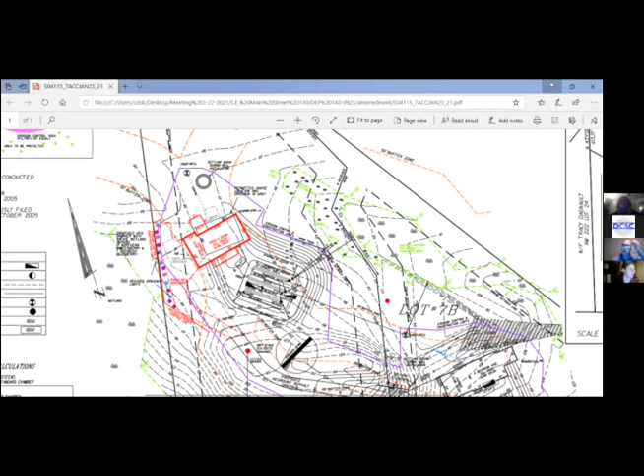I'm opening the Google Drive. I also don't remember which one this is. Excuse me, but I don't think there is a 170 Southeast Main. I live at 172, it's 130. Oh, it says 170 — where does it say that? In today's agenda. The draft number 1 said 170 and I was corrected, so I changed it to 130. So what's posted is 130. I have it 130 everywhere that I'm looking. So I'm looking at what was in my email, but maybe that's old, maybe there's — it was the first email that was updated.

I think this is the one where the gentleman has some physical problems and is looking to modify his plan. So it was going to be a 2-story and it went to a ranch, and we were having issues with the perimeter there. Correct. Did you want to give a brief rundown or recap? Yeah.

For the record, Margaret Bacon, engineer with Civil Site Engineering. I'm here representing David LaRue, requesting a modification to an existing order of conditions for 130 Southeast Main Street.

As discussed at the last meeting, we're revising the house plan from a 2-story colonial to a 1-story ranch, which has a slightly larger footprint, shown in red. The originally permitted driveway had a garage coming in on the side, which is causing us to move back the erosion control and ask for this modification, since it's a slightly bigger footprint than what was previously permitted. The reason for the house change is medical reasons for the property owner, who would like a 1-story ranch instead of a 2-story colonial.

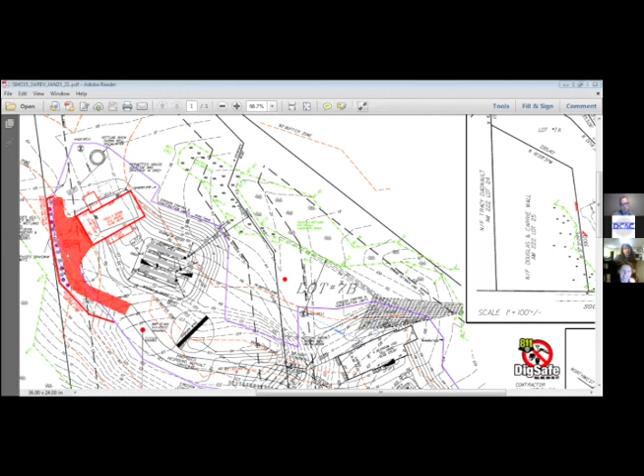So, there it is. I kind of hatched the relocated driveway in red, and if you look a little closer you can see the grading changes I made.

I've changed the grading so the water will flow down the driveway - here's the grade line, spot elevations, and then it flows that way, so I'm not flowing directly into that wetland there. I've also created a little berm here where these plantings are going to be, to keep stormwater on this property.

The impacts to the buffer zone are slightly larger - total buffer zone impact change is 1,200 square feet. Initially, total impacts before were 21,655 square feet, and now it's 22,915.

But I think we've addressed all the comments that the commission had at the last meeting. Okay.

Thank you, Margaret. Alright, so looking at this in the files in the Google Drive, board, did we have any updated comments or questions?

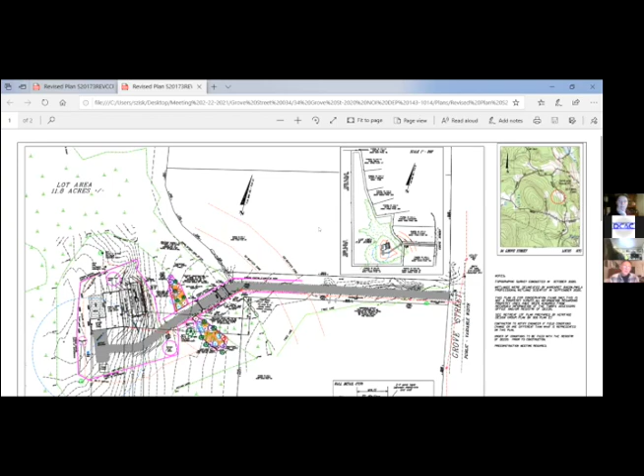I would want the driveway, because that contributes probably the most runoff, to run through the replication area before it gets to the wetland. Actually, I've got a lot of the lawn area and the house area all grading down towards those replication areas. So actually, the replication areas are going to act like little stormwater attenuation basins, which has benefits in itself.

Right, I agree. But the driveway itself - sometimes driveways get two wheel rut marks that carry the water. So I would want to make sure the driveway is crowned or slanted so the water runs off it before it gets to the wetland, and runs into those replication areas.

And I guess there is grading under - I can see it now, it's just that it's shaded. Correct, well I hatched the driveway so it sticks out.

And I do have high points on that crossing, but I can get most of the water to go towards those replication areas. This was a paved driveway, right, Mark? Yes. Yeah.

Yes, it says asphalt driveway. So if you could, I would like to see it go to the one below the septic system, because from there it then has to go through the pipes.

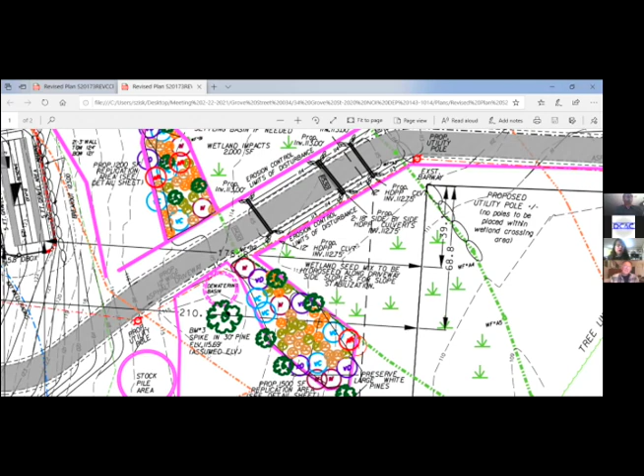That's further attenuation of any stormwater. I'm really thinking of the neighbor, because they already have some issues with water in their backyard. Yeah, what I can do is put a little swale along that driveway to funnel the water right over to that upper replication area. That's what you're looking for, correct? And I'm looking for the grades on those lower grades, instead of having them move water to the right, have them move water to the left.

As you're leaving the house and going towards the road, that lower grade, that 116, it's coming across on a diagonal. It should be a diagonal the other way, so that the water comes off that driveway and goes towards the detention area on the left side of the driveway as you go out to the road.

So looking at this plan right now, you want mostly everything to go to that upper replication area? I think that would be best, in my opinion, yes. And I can easily do that. All I have to do is put in a swale along the edge, on the high side of that driveway, to funnel all that water over there.

Right, but the driveway water too, not just the water before it hits the driveway, but the water on the driveway itself. Correct, yeah, no, I know what you mean. Okay, thank you.

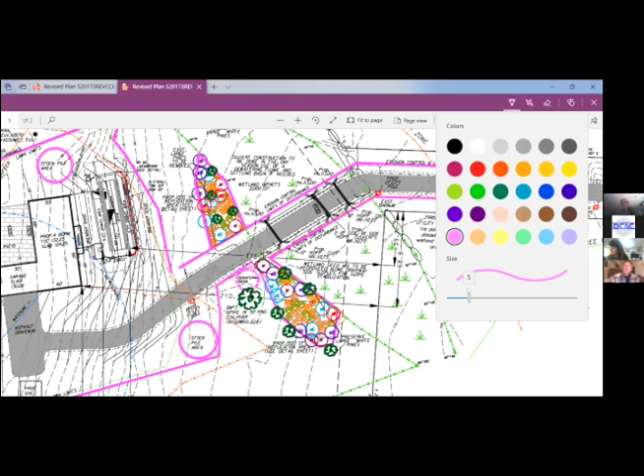Anything else, Mark? No, that's my only concern. And Eric? What was the size of the culverts?

I've got two 18-inch culverts in the middle, side by side, that take the brunt of the flow. Then to spread it out during higher flow events and accommodate that sheet flow, I've got two 12-inch culverts on each side. So in the middle there's two 18-inchers, and then on both sides are two 12-inch culverts.

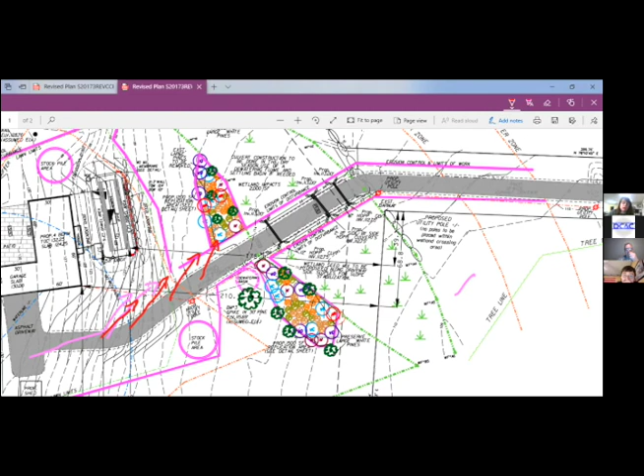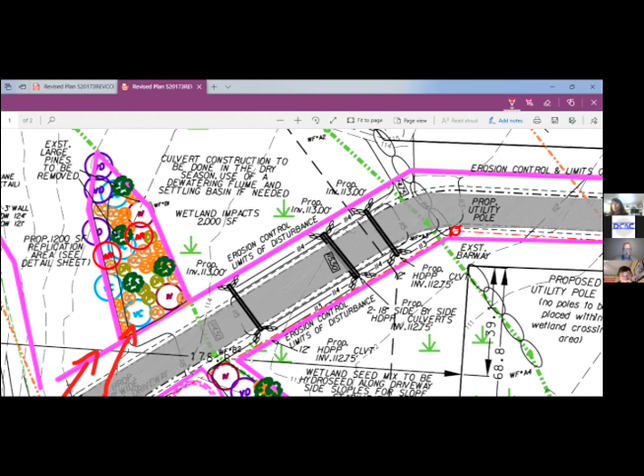Okay, thank you. And those culverts can accommodate a 100-year flood. If we ever get the 500-year flood, I have a low spot in the driveway so we don't create a dam. So in those super high storm events, if we ever get one, you can see it right in between the two replication areas, I have a little low point. That acts as a berm if we ever got flooding that much, but that's a lot of rain.

Okay, any other questions or comments from the board right now? All right, this is an open public hearing. Is anyone here at this meeting for this plan, 34 Grove Street?

Okay. Dale Bangmer, I'm here. Dale, address or representing company?

Dale, representing Haywood Homes. We're going to build this lot, and I appreciate your patience. We're trying to get it done, and I have a closing. The sellers are very anxious, and I think we've addressed everything. The impact in my mind is less than it was prior. So we're hoping for a favorable decision tonight.

Okay, thank you, Dale. I guess before I entertain motions, I want to make sure - Mark, I agree with your recommendations and your concerns, and I saw that Steve drew some nice lines on the diagram. Are we okay if we condition this plan, or do you want to see this plan come back with amendments? No, I'm okay if we condition the plan.

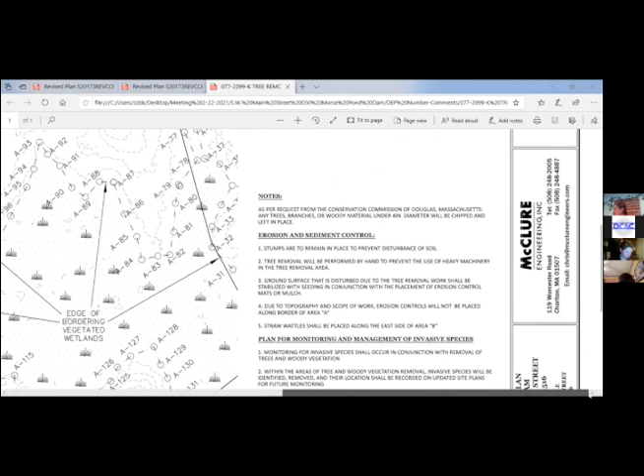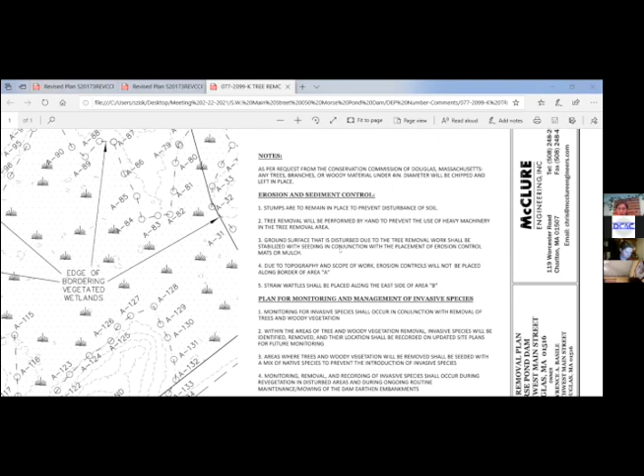You can see them on the right-hand side of the plan there. Basically, the arborist that the owner has working for him will be able to identify the invasive species and monitor them by identifying them, showing where they're located in the affected area, and removing them when they come across them. Then they'll monitor while the replanting revegetation takes place, so the invasives don't overtake the area that has been affected by the tree and woody vegetation removal.

Was DEP satisfied with that? They were. All they wanted us to do, we did talk to Kim, and she didn't want anything too extravagant, but she just wanted us to identify a plan for the monitoring. With this type of project, we really haven't had to do much of that in the past, but I guess this is becoming more and more prevalent. So they at least want the individuals doing the work to be cognizant of those invasive species, and don't want them taking over when the revegetation occurs during the work process, which makes sense.

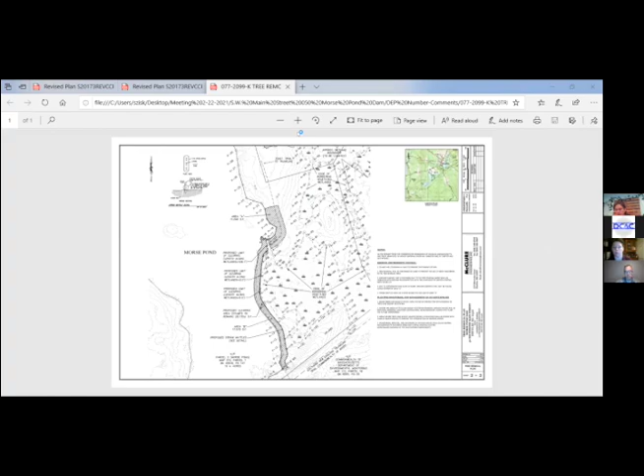Is the area that you would be replanting with natives, the area of disturbance where the vegetation is being removed, is that all wetland or is some of that upland? Most of it's upland. We're trying to keep the trees and woody vegetation off of that. The actual embankment's kind of a hillside, for lack of a better description. Along the area of the wetland, we don't really want to get into the wetland, we want to stay out of it, but just remove those larger trees so they don't affect the embankment area. That's the key, so these trees don't create root balls, and then when they get blown over, disturb that earthen embankment. So ideally, it's just the grassy area that we maintain after this maintenance occurs.

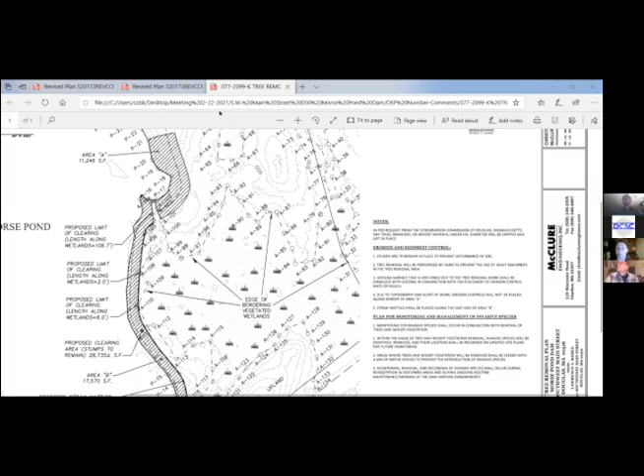Not hearing any comments from the general public, I'll entertain a motion to close the public hearing. So moved.

Art, hold on. Monson, yeah. Oh, you got somebody? Yeah, hold on a second. Oh yeah Mike, I'm looking up the seed mixes from New England Wetland Plants right now. I wonder if we could just have it be part of the discussion tonight.

How about the New England Erosion Control Restoration Mix for detention basins and moist sites? It includes riverbank wild rye, creeping red fescue, little blue stem, big blue stem, switchgrass, upland bentgrass, nodding bur marigold, hollow stem joe pye weed, New England aster, bone set, blue vervain, soft rush, and woolgrass.

I don't know, no it's no good, Katie Grace. Doesn't have milkweed in it. So sorry. There's plenty of color though. Yeah, no.

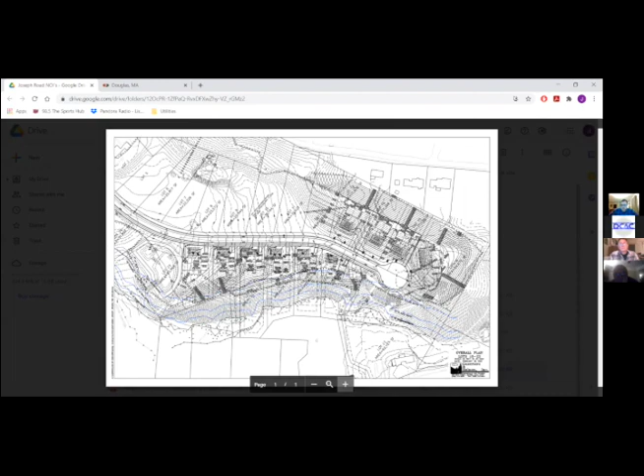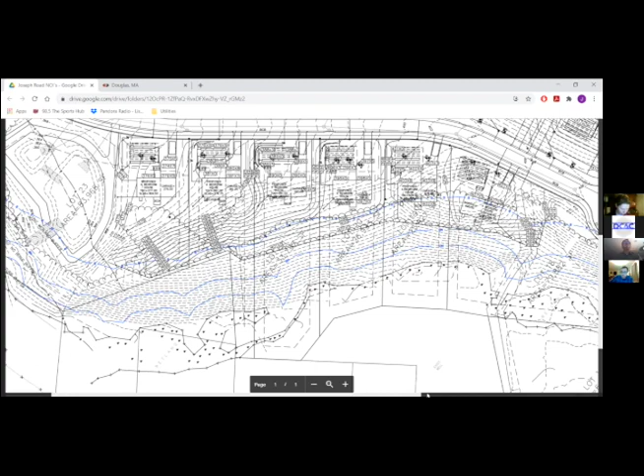Has this plan been submitted? No, it has not. I did receive word from Steve Donatelli, Board of Health agent, that the past revision discussed at the last meeting met his Board of Health comments and he would be approving those. Currently, approval is on hold until any additional comments are finalized. I will be able to get all Board of Health plans re-revised to match any of these grades if that is sufficient for the commission. Just didn't want to create more work if we have further changes occurring.

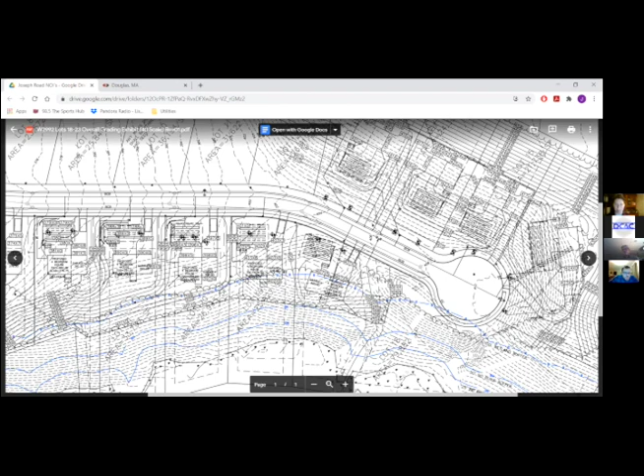Understood, that's a good strategy. I thought this one here was the colored copy. Excuse me, bear with me one second. You want me to bring up both of the plans, the old and new ones? I know I forwarded you over a copy. I wasn't sure if you were able to put both 40 scale plans up, I emailed you around 5:30. I needed the JPEG. Got you, my apologies, I was away from my desk at the time.

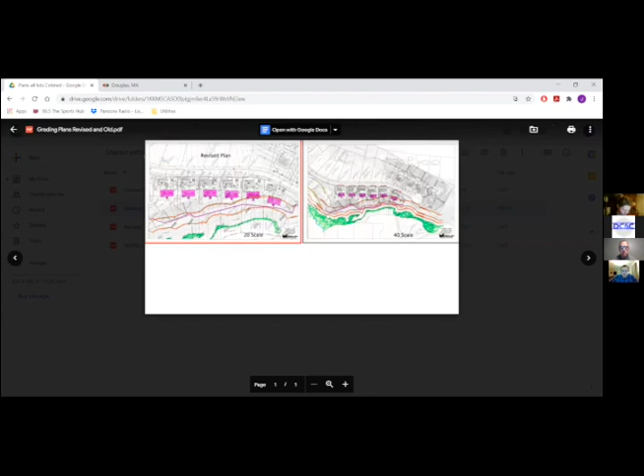I think it might be good to bring up both if you have my PowerPoint. Sure, that is, I believe, this one here. There you go. And then I also do have a 40 scale one in here that we can take a closer look at.

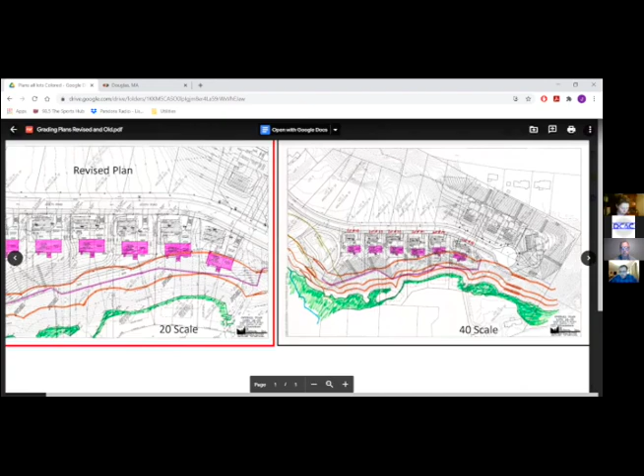But on the right-hand side we have the original 40 scale plan. I'll zoom in a little more here for everyone. This was showing that we had this purple erosion control barrier that ran along about 1 to 2 feet outside of the 25-foot no disturb buffer that the town has. And then we were proposing some grading as well. There was a small portion that clipped into the riverfront buffer.

As part of the new redesign, we were able to eliminate all proposed walkouts from the site, and in several areas able to create a large berm that would run along the back of the properties per the request of the commission, to try to channel all that water towards the detention areas and through the backyards. In addition, we were able to pull all the grading outside of the 50-foot no build buffer per the request of the commission.

So currently we have grading stopping right here where my cursor is. Not sure if everybody can see on the lower left-hand portion of the screen, the yellow here is where the 200-foot riverfront buffer is. We're going to be outside of that with this new proposed grading, so no disturbances to the 100-foot or 200-foot riverfront. And then standard grading was proposed originally for that lot.

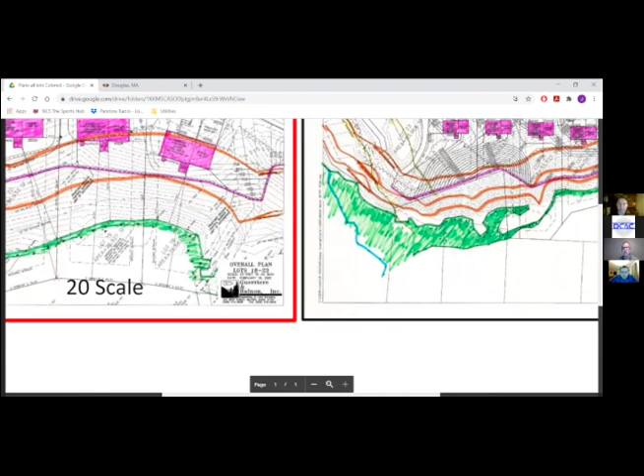John, I would say that was great for the overview, but I would mostly like to stick to lot 18 since that's the opening of the hearing. Okay, yeah, sure, sorry about that.

So as far as lot 18 goes, that is this lot located on the right-hand side. Some of the comments we had were regarding the backyard and some of the grading there. Again, the walkout was eliminated for this one.

We did pick up the footprint by about 2.5 to 3 feet, as well as flip the garage and squeeze the septic system into a much tighter spot, located at what I believe is the northwest corner of the site. From there, we have a 406 grade that ties into existing, and a 402 grade that ties into existing.

We're about 52 feet to where the edge of the wetlands is, so we're outside of that 50-foot no-build per the request. We also did expand grading on the right-hand side. I can show you on the 40 scale plan the furthest extents for it, but essentially we had a 414 grade right at the very far right-hand edge here.

We graded down to 408 to create a flatter area that could be a usable yard for the folks. The rest of the grading here is just us trying to chase the contours until we're able to match everything. Contours that we are proposing are 3-to-1, so they would be non-erodible slopes once stabilized.

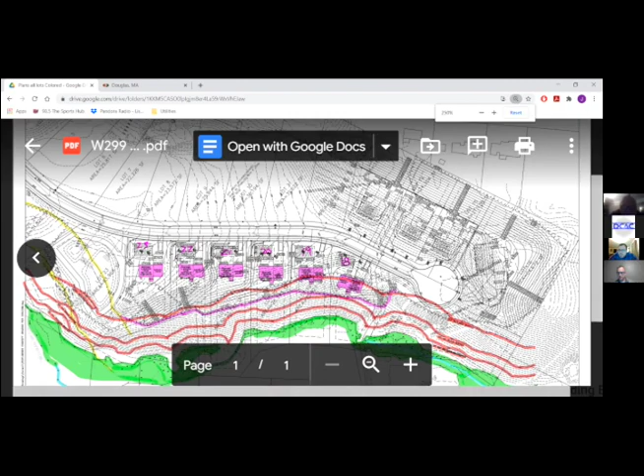So these are proposed paved driveways with bulkheads now? Yes, that is correct, and this is the 40 scale plan. Lot 18, I did try to put the lot numbers up near where the septic systems are, if that's a little bit clearer. Again, the purple line represents where the erosion control barrier would be, also representing the limits of work as well as the limits of the yard.

With this one here, since we have the cul-de-sac pinching down in this spot, I stopped the grading right about where my cursor is. Then that's pitched forward, and there's going to be a high point in the center here, or I can pull it back a little bit to try to pitch some of that water towards the driveway and then onto the roadway at that point.

Well, how far is the house now from the erosion controls? From the erosion controls, it's only going to be the deck off this backside that's relatively close. Otherwise we're providing about 15 feet or so to where the erosion control barrier would be, and all houses are located outside of the 50-foot no-build. I believe the closest part for any of the homes was closer to the 60-foot range. But once I get the Board of Health plans updated, I can make sure any dimensions are very clear on there for the commission to take final looks at. Yeah, thank you.

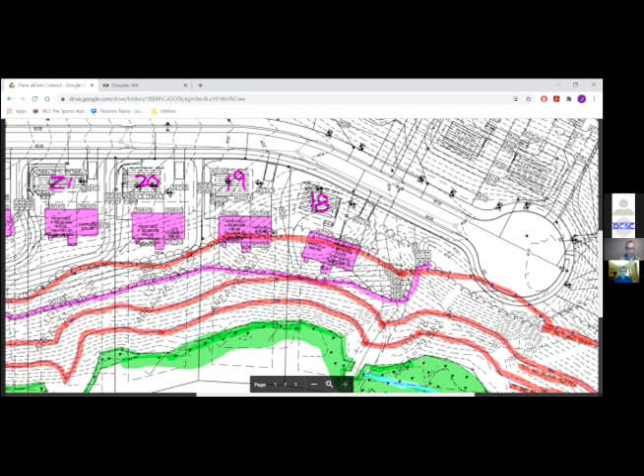That would be my... well, I wasn't talking about the next meeting, I'm talking about the meeting after. Sorry, the meeting in March, after March 15th. I definitely think that is something I can work on my end to get plans over to you guys, and I'll try to do that well before the 15th as well.

The 15th would work because there's nothing really on it, and then we could carry all these over at once. I'd like to make a motion to continue all these to the March 15th meeting.

All right, so why don't you take them one at a time? We're off. Going to do them one at a time? Do them one at a time?

Yeah, all right. So your first motion is for lot 18, Joseph Road, lot number 18, to continue to the meeting for March 15th. Second. Seconded, roll call vote. Art Montverde, aye. Mike Greco, aye. Eric Harris, aye. Mark Mangiamai. Thank you.

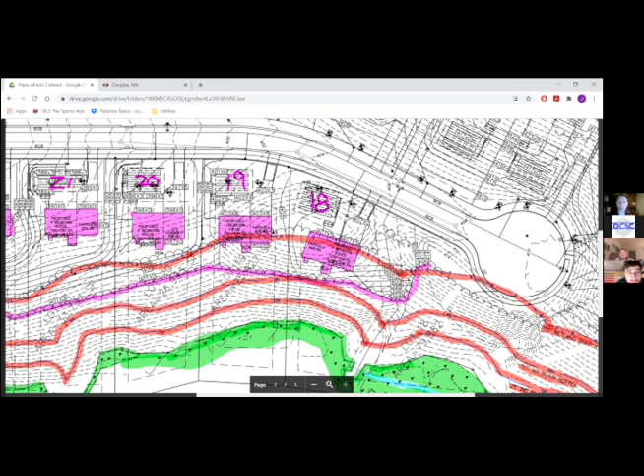John, could you stop sharing your screen? I want to be able to see the commission's faces. Apologies. No, it's fine. For me, I like to see when we're doing votes.

All right, I'll entertain a motion for lot 19. I move we continue the public hearing for Joseph Road, lot 19 to March 15th. Second. Roll call vote. Art Montverde, aye. Mike Greco, aye. Eric Harris, aye. Mark Mangiamai. All right, thank you.

I'll entertain a motion to move the public hearing for Joseph Road, lot 20 to March 15th, 7 p.m. So moved.

Second. Good, roll call vote. Art Montverde, aye. Mike Greco, aye. Eric Harris, aye.

Mark Mangiamai, thank you. I'll entertain a motion to continue the public hearing on Joseph Road, lot number 21 of Sleepy Hollow, to the meeting of March 15th at 7 p.m. So moved. Second, seconded by Mark. Roll call vote: Art Montverde, aye. Mike Greco, aye. Eric Harris, aye.